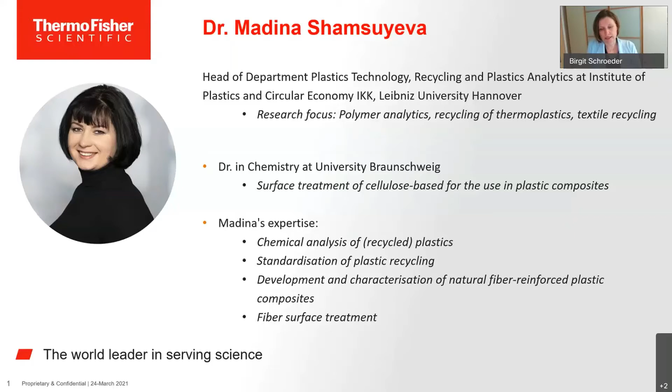Thank you very much for the invitation and for the very nice introduction. Today I would like to give you a short overview about plastic recycling in the circular economy from the perspective of the scientific institution, and I will talk about definitions, characterizations, and standardization of plastic recyclates.

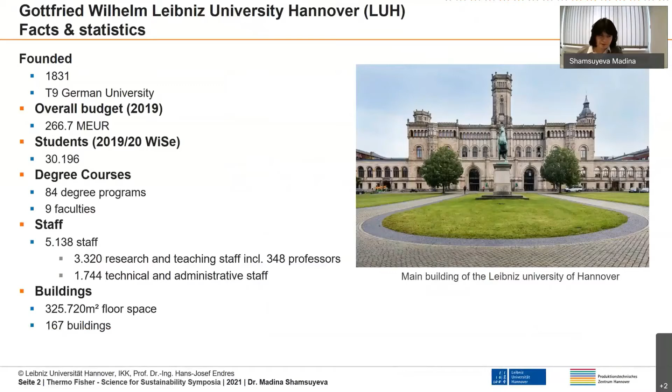First of all, I would like to shortly introduce my institution and the University of Hanover. Basically, it is one of the T9 universities in Germany. It offers around 84 degree programs and includes 9 faculties. The Institute of Plastics and Circular Economy belongs to the Faculty of Mechanical Engineering and is located in Research Campus Garbsen, where you find 20 institutes of the mechanical engineering faculty, all specializing in different fields and working closely with academia and industry.

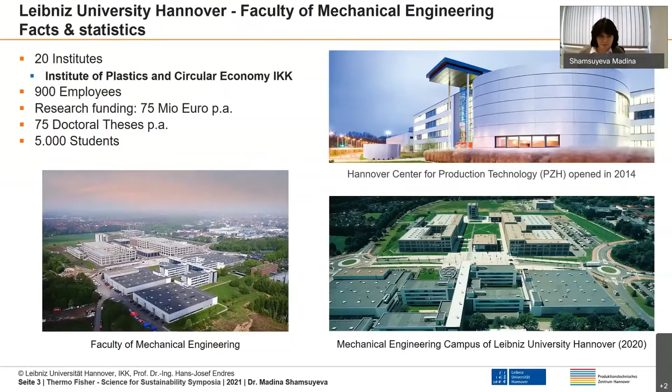So basically, the history of the institute starts in 1999, where Professor Endres received his first professor position at the Hanover University of Applied Science and Arts and set up the Institute for Plastics, Bioplastics and Biocomposites. Later on, in 2013, his research group was extended to the Application Center of Wood Fiber Research. The research focus was extended from bioplastics and biocomposites to textile composites and hybrid composites, as well as recycling. And since 2019, nearly half of the research group, together with Professor Endres, came to the Leibniz University and set up a new institute with a research focus on plastics technology and recycling.

Besides other research focuses, we work a lot with standardization and different plastic analytics. In the next slides, I would like to provide more information about these research topics.

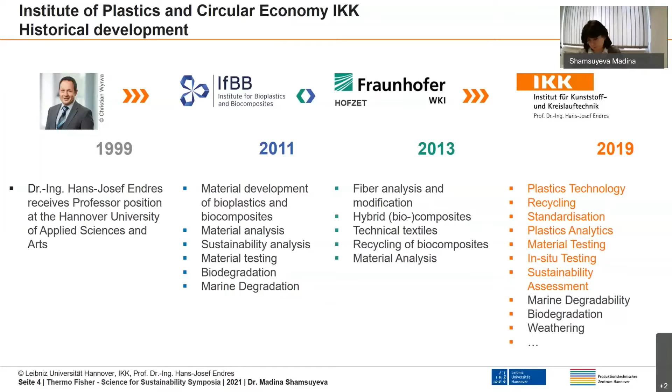So basically, plastics is, on one side, an amazing, innovative, and unique material. On the other side, it is always criticized for its bad environmental effects and challenges with recycling. But it's important to keep in mind that plastics enabled a lot of things in our world: medicine, electromobility, transport. All of these trends would not be possible without plastics. So I think we need to be thankful to plastics for the possibilities they give us.

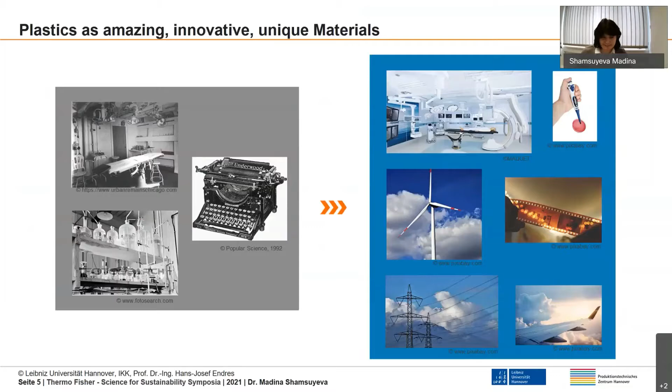But at the same time, these materials with their very good performance, mechanical, thermal, the properties themselves, and at the same time the durability of these properties — still, due to different reasons, society uses these materials for products with very short lifetime. Basically, a lot of single-use products are made of plastics.

At the same time, especially during the last year, we saw that plastic material offers very important products, and we don't have any alternative for this material. So the only way to make this material more useful for our daily life is to find solutions to integrate it into the circular economy.

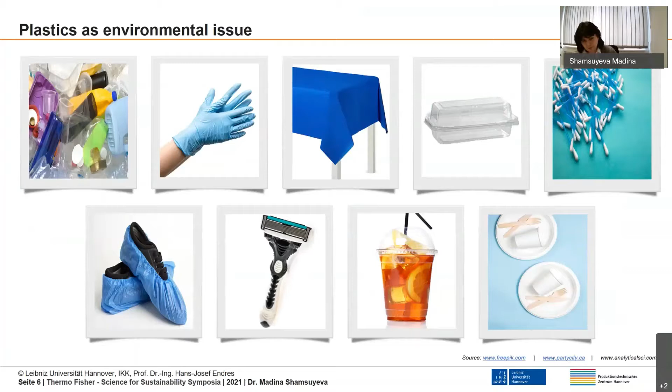If we have a look at the plastic material flow nowadays in the field of plastics, these numbers, the statistics, refer to the Conversio market study, and you can see how complex it is.

So we have some feedstock, renewable and fossil, which then goes to the converting and consumption, and after consumption, as it passes to the use phase in different fields, nearly 75 million tons is just unknown plastic waste, which is somewhere in our environment. At the same time, nearly 75 million tons is landfilled, which is also not the best solution.

So basically on this slide, you can see that there is a high demand for a solution, and we don't have so much time for the discussion of how to perform this solution. But still, the main point is that we need high quality plastic recyclates and processes which enable this quality.

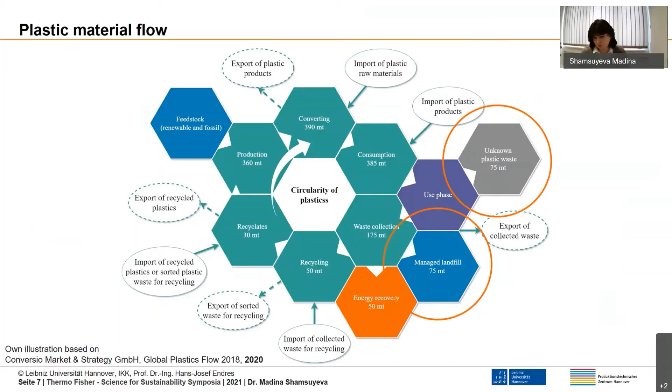So what are the challenges of the recycling economy? Why can we not have it today?

The main difficulty is that the quality of the recyclate - it's not only the quality of a certain recyclate, but it should be performed over a certain time. If a company wants to use plastic recyclates as feedstock material, they need the same quality of recyclate over years in the same amount, so it should be sufficient amount with a certain quality. To realize this demand, it's important to have clear standardization standards in this field, and this part is still in development.

The next point is the technical data sheet. If a plastic product producer wants to use the recyclates, they need a technical data sheet - what are the material properties of the recyclate? Mechanical, thermal, processing properties - and who's responsible for developing these technical data sheets? Who is responsible for the numbers stated in them?

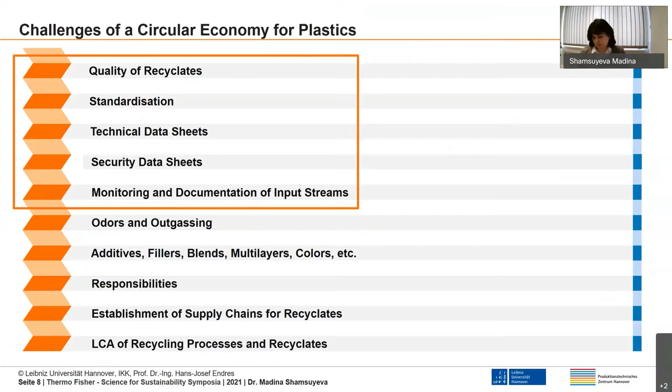This was the main motivation for IKK to be involved in standardization activities, because as a research institute, we receive a lot of inquiries where companies or industry want to develop a new product or process for the use of plastic recyclates, but still they don't get the material, or they have some product problems. We noticed very early that the problem is not only technical, but also there are no universal definitions.

So wording is a problem - the characterization of plastic recyclates, what I just mentioned as technical and safety data sheets. The recycling processes are very different, and the products also. So we need to have a little bit more structure and clarity in this field.

Now, IKK is a member of 2 different DIN committees. DIN is the German Institute of Standardization, and the DIN spec is a specification - like a draft of a standard. It was initiated by cirplus, and the consortium leader is IKK. In this case, we have 1 year to develop a DIN spec, which would be used for standards for trading and processing of plastic waste feedstock and recyclates.

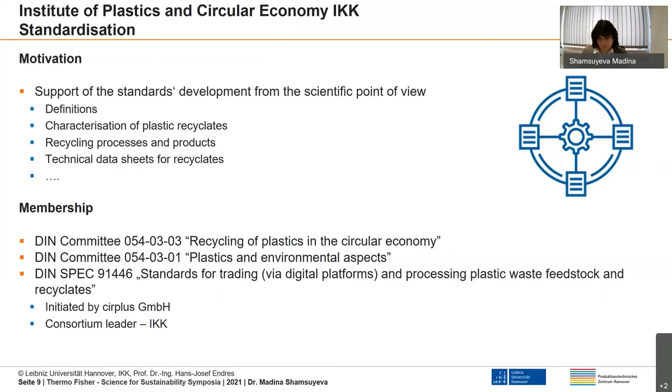So the focus of the DIN spec is to define clear definitions, sum up existing standards, and define the wording used in plastic recycling. We define the quality grades - there are 4 quality grades which are defined according to the data information available on the materials.

Transparent and clear labels regarding the type of recycling and recycling content, processing, handling of the plastic waste entering the recycling process. This DIN spec is the first project in this field which is so large and extensive, so we can use this as a starting point for the next standards in this field.

But now I would like to talk a little bit about these 3 stages, which are associated with the challenges regarding definitions and products. These are: waste material, recycling process, and final product.

Basically, this journey from waste to final product is very long - just a second, so I have my laser pointer. This journey is very long, and at each of these stages we have some co-products - products which can be used for other applications or sold. At the same time, each of these stages has some waste which cannot be recycled and has to be disposed of.

And if we talk about waste, according to existing international standards, there are 2 definitions, which can be defined into post-consumer.

The material which is generated by the end users of products, which has fulfilled its intended use and purpose, and can no longer be used. The pre-consumer, or sometimes also called post-industrial material, is the material diverted during a manufacturing process.

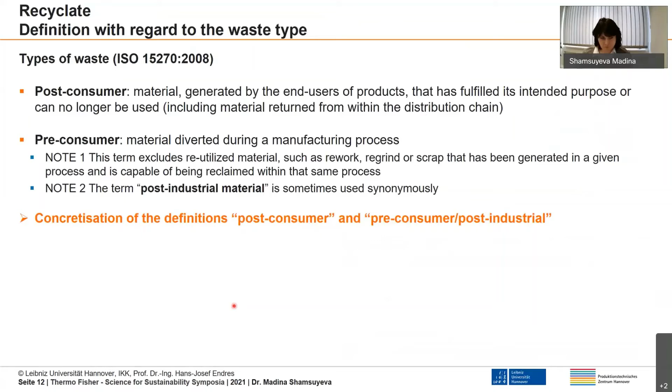If we are talking about the recycling process, we have certain material which enters the recycling process. But at this point, there are very different recycling processes available nowadays. Most of them, everything except solvent-based recycling, are defined in international standards.

But still, for example, enzymatic or biological recycling, also sometimes called organic recycling, in this case we don't get a material at the end. So this waste is not landfilled or lost in nature, in our environment, but still this is not a material which can be reused for technical application. So maybe it's not so good to handle all of these processes as equal.

But still, there are further processes like solvent-based recycling, mechanical recycling, and chemical recycling. The mechanical recycling is currently one of the most used.

So basically, in this case, there is no depolymerization, the material is still in its original form, but there are certain pre-treatment stages, like washing, grinding, then filter-based extrusion, and final injection molding, and the material is used for the next application. This is a very simplified procedure, it can be much more complicated depending on the certain product applications.

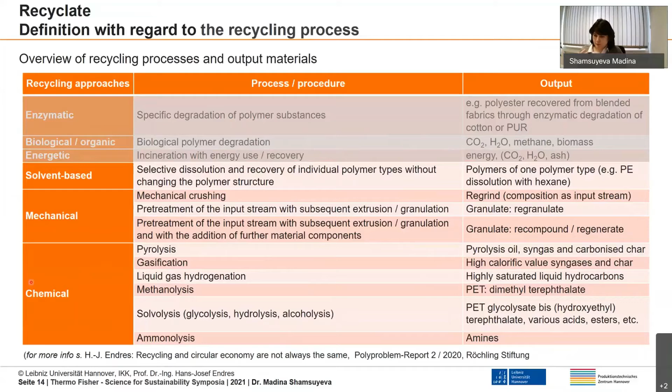In the case of chemical recycling, the polymer is broken down to monomers and used for the generation of new feedstock materials. Basically, mechanical and chemical recycling processes are mostly used nowadays.

But still, if we talk about the definition of recyclate, the material which comes out of this recycling process - we already discussed input material, and this is output material - the current definition of the international standard says that the recyclate is a plastic material resulting from the recycling of plastic waste.

But in the case of chemical recycling, we don't have plastic material resulting from the recycling, we have some feedstock which can be used for the production of new materials for the plastic industry. So this definition is mainly focused on mechanical recycling.

Secondly, there is no regulation regarding the recycling processes used. And the definition of the recyclate, its documentation and monitoring of the recycled content, is not clear enough to be used for different recycling processes.

For example, in the case of chemical recycling, usually it is the mass balance approach which is used. So it is documented how much waste enters the facility, and during this manufacturing process, it is mixed with virgin material, and finally, as an output stream...

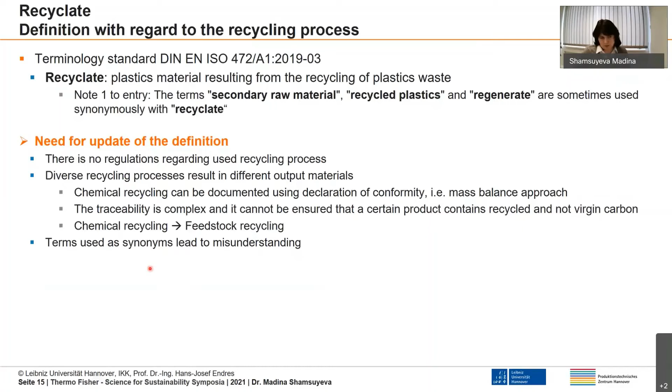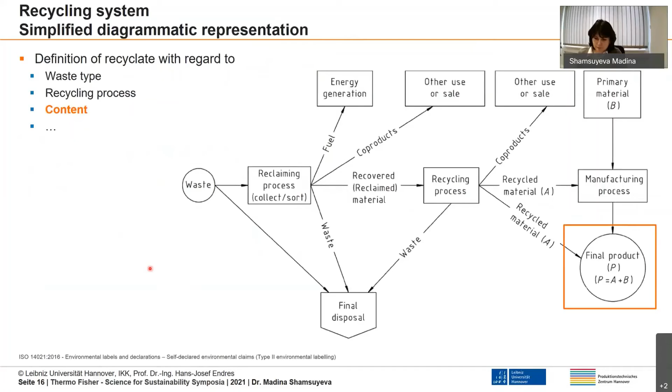Consequently, there is a need to update these definitions. And finally, if we talk about definitions in the final product, which is mainly part recycled and partially virgin material.

And the recycled content is one of the optional data. Optional means the company which uses this standard for characterization of its polypropylene recyclate is not obligated to give this data. If it offers some advantage for the product, the company can provide these numbers, but it is not obligatory. The same is valid for all other properties defined under optional data, such as ash content, bulk density, and so on. But for the company which processes this material, these data are very important, or also for the one who uses these materials for the final product.

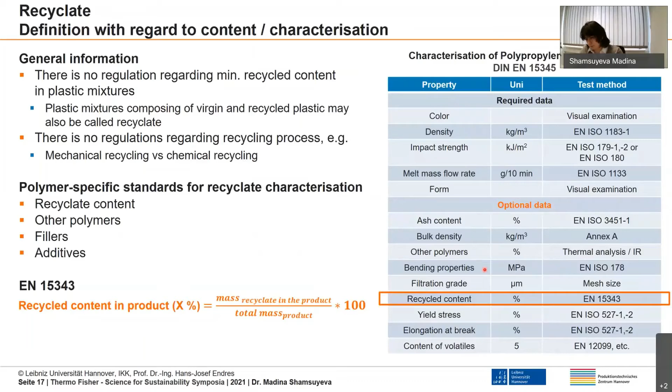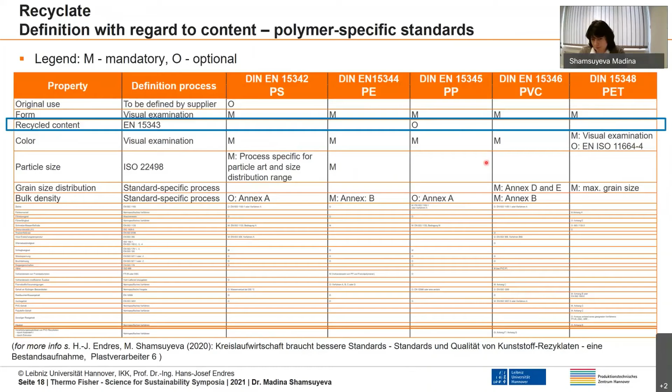If we look at further standards, for example polystyrene, polyethylene, and so on, you can see that in all of these other cases, the recycled content is not even defined as optional data. This is a table from one of the prior publications. The table is very long, but basically what we have done here is summarize this table for all of these different plastic materials to provide an overview of which technical data are mandatory and which are optional for the characterization of different plastic recyclates. So you can see recycled content is one of the data which is basically not even defined in most of the plastic-specific standards, although this is very important data.

Another different point is the quality of the required data. For example, color. It is mandatory in all of the plastic recyclate standards, but still, how should it be defined? In this case, you can see that it is visual examination. So basically, there is a person who says, this is black, this is white, and so on. And of course, this is not the best way to characterize a material which has to be used for the production of new materials, because we want to have the same color for all plastic materials during their use phase.

Secondly, it is also associated with some effort during optimization of the color. If you have a bright color, it is easier to make it darker, but vice versa, it's much more difficult and also much more expensive. So we need to define the quality of this data, how it should be defined for certain materials. These are only two examples, so this table is very long.

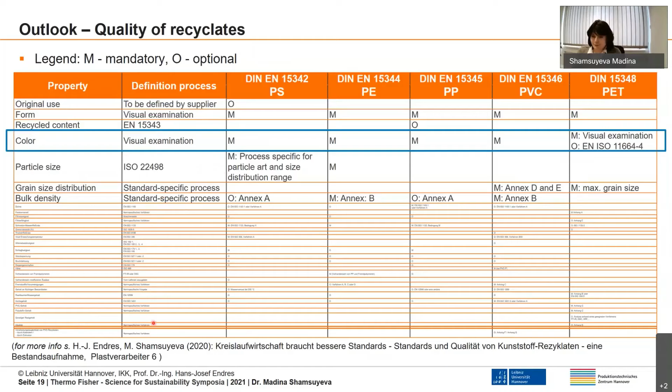So basically, the definition of the term has to be updated with regard to waste type, recycling process, and recycled content. Secondly, there are some existing standards on the characterization of polymer recyclates and wording, but still they have to be updated because these were the very first steps of the plastics industry towards circular economy, and it's very nice that these steps have been done. But still, now we observe very dynamic growth of the field, and it is important to improve the traceability and understanding of these definitions, and it also should be universal.

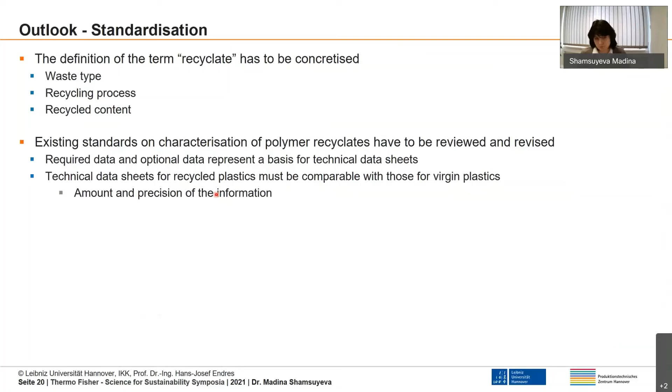A lot of discussions are performed about mechanical versus chemical recycling, because these two recycling processes are used the most, and both of them have their advantages and disadvantages. For example, let's talk about the quality of the output material. In the case of mechanical recycling, it is proportional to the quality of the input material. So if we have a very pure, stable input material, the quality of the output material is going to be of the same quality.

On the other hand, it is quite difficult to make—difficult meaning expensive, sometimes also technically not possible—a high quality product from a very low quality input material, because there are always further additional steps required, and materials like additives and so on have to be added in order to improve the quality.

On the other side, chemical recycling is capable of manufacturing very high quality recycled materials, which are suitable for applications in sophisticated fields, like medicine or scientific applications.

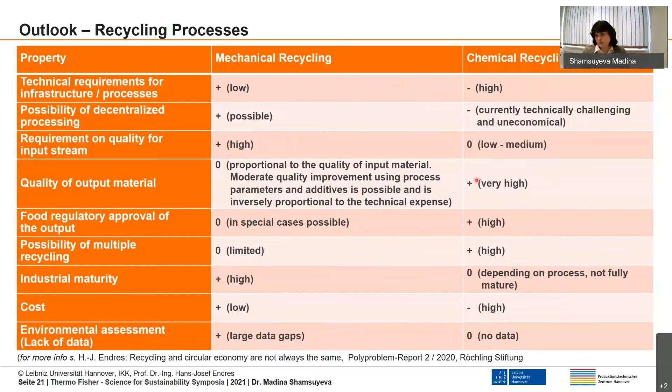Another important point is the monitoring of additives, which is challenging for both of these recycling processes. But in any case, during the use phase of the product materials, we need additives in order to get good mechanical, thermal, and coloring quality, and various materials are used for this aim, like fillers or different reinforcing components and so on.

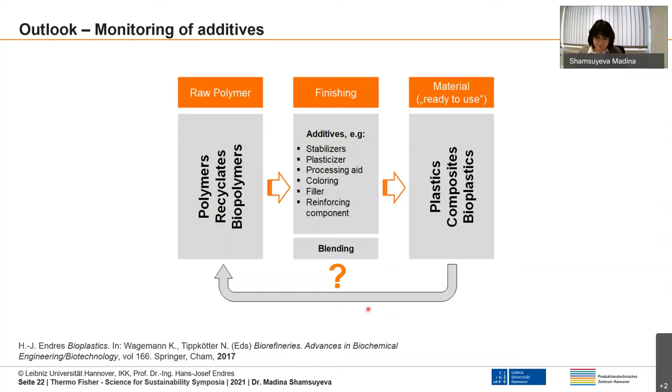But still, we have a lot of questions about how these additives act during recycling, and what kind of effect they have on the quality and properties of the plastic recyclate. Even though there are a lot of REACH conformity declarations, still from the technical point of view, there are a lot of questions.

As I already mentioned, there are still a lot of questions in the field of plastics recycling - definitions, characterization, standards - but still the plastic recyclates are already available commercially. So this is a very exciting and dynamically growing field. But still, we need to make further steps so that it works better. And it's very important that the first steps were already done, so we have a basis, and it works very well. So I'm really very optimistic about the future of plastic recycling.

Of course, plastic recyclates always compete with virgin materials. And in this figure, you see a simplified representation of these advantages and disadvantages regarding cost and quality as well as performance, because at the end we are talking about circular economy, so the price is important.

There are certain recyclates which do not cost anything because companies want to get rid of them, and they pay for the disposal. At the same time, these materials in general don't have high performance and quality. There is a second group of plastic materials which you have to buy, but still the quality difference between the plastic and virgin materials is high - the virgin materials have significantly better quality.

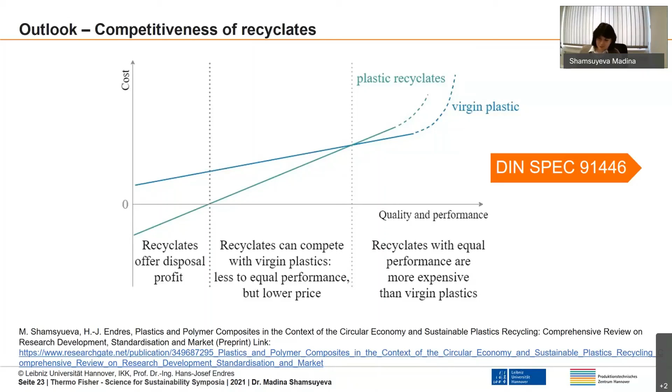This will be available for comments from external partners. Now we are working on this project, and it will be available on the internet on the DIN homepage, so that you can also comment from your side, and afterwards these comments will be used during the finalization of the document. In May 2021, in two months, it will be available for comments, and in October it will be finally published for use.